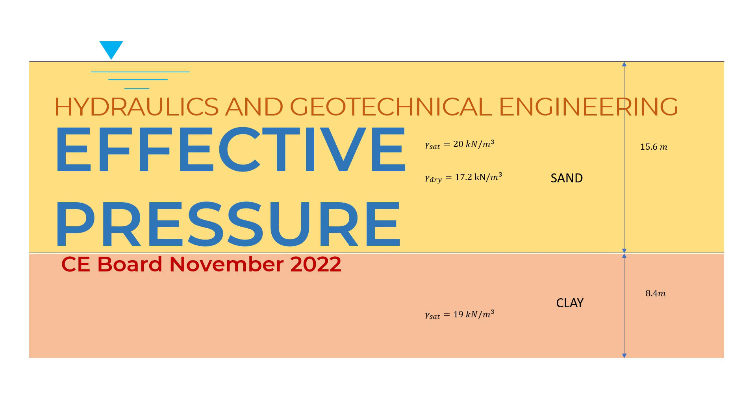So, we have here another problem from the CE board November 2022 under hydraulics and geotechnical engineering. This time we will get the effective pressure. Okay, so without further ado, punta tayo dito sa ating problem.

A clay, gamit lang tayo ng laser. A clay layer is 8.4 meter thick. So, ibig sabihin, yung thickness ng ating clay is 8.4 meter. Is overlain by 15.6 m thick sand to ground surface. When the water table is at the ground or at the sand surface, the saturated unit weight of the sand is 20 kN per cubic meter, and its dry unit weight is 17.2 kN per cubic meter. The clay has a saturated unit weight of 19 kN per cubic meter.

The groundwater table was lowered 7.8 meter and the degree of saturation of the sand above the new water table is 30%. Number 1 is evaluate the effective pressure at the mid-height of the clay before lowering the water table. Second, evaluate the effective pressure at the mid-height of the clay layer after lowering the water table. And third, evaluate the effective pressure at the mid-height of the clay layer when there is no water in the layer but the sand remains in moist condition with the same degree of saturation.

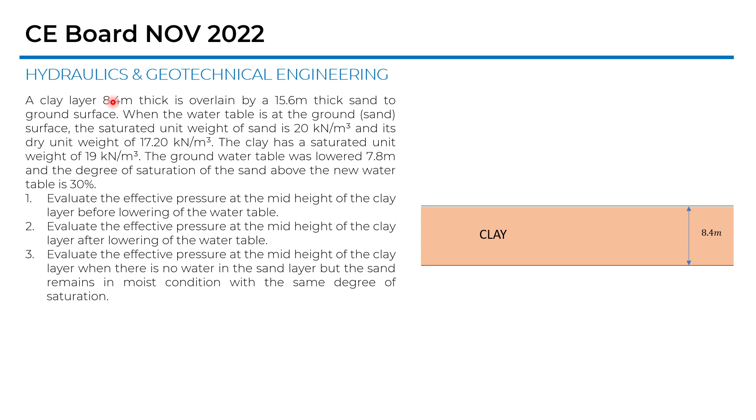Okay, so i-drawing muna natin yung kalagayan. Ito yung clay that is 8.4 meter thick, tapos overlain by the 15.6 meter thick na sand. So ito yung magiging surface. When the water table is at the ground, ibig sabihin andito sa surface ng sand sa taas, dito natin matatagpuan yung water table. The saturated unit weight of the sand is 20 kN per cubic meter, the gamma dry is 17.2 kN per cubic meter, and yung gamma sat natin sa clay is 19 kN per cubic meter.

Tapos, the groundwater table was lowered. Mamaya na yan. Sagutan muna natin itong number 1, evaluate the effective pressure at the mid-height. Kasi mamaya ilo-lower pa yung 7.8, dito bababa itong water table sa number 2. Tapos sinasabi dito na the degree of saturation is 30%. Kahit na bumaba ito, magiging 30% pa din yung degree of saturation dito sa taas.

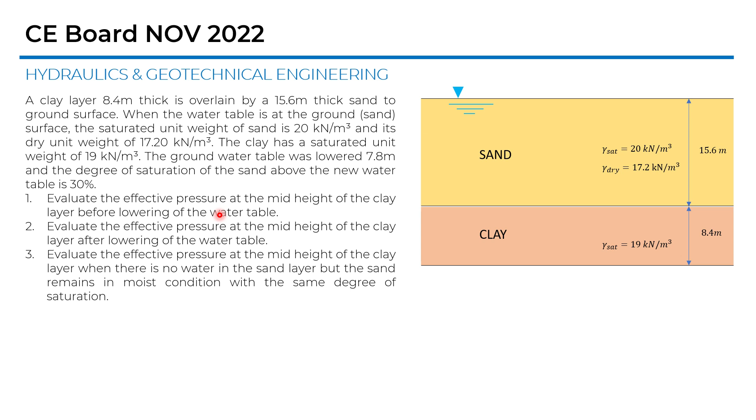Punta muna tayo sa number 1, evaluate the effective pressure at the mid-height of the clay. Asan ba yung mid-height ng clay? I-divide natin yung 8.4 into 2, so 4.2 meters. Dito natin matatagpuan yung mid-height ng clay. Ano yung magiging effective pressure niya dito sa 4.2 meters sa clay?

Total pressure muna natin i-compute. Saturated kasi siya kasi may halo pa siyang tubig. So 19, gamma sat, times 4.2, plus 20, gamma sat ng sand, times 15.6, kasi may halong tubig. That is your pressure papuntang mid-height ng clay, which is 391.8 kPa.

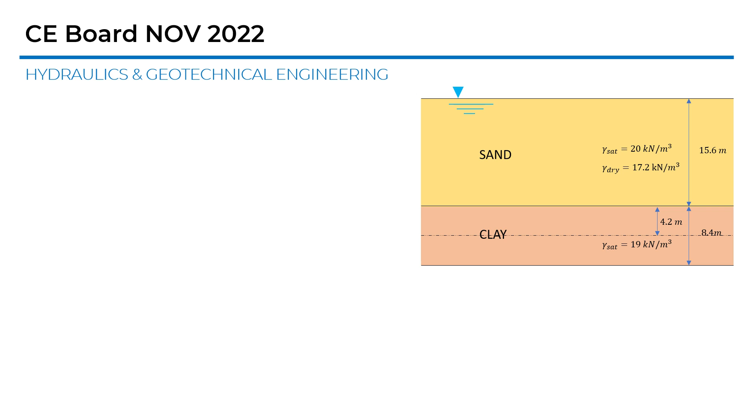197.56 kPa. Second is evaluate the effective pressure at the mid-height of the clay after lowering the water table. Ilo-lower down natin yung water table ng 7.8, which is also the mid-height of the sand, kasi 7.8 plus 7.8 is 15.6 meters.

So, ganito paano i-compute yan. Wala ng tubig dito sa taas, pero given tayo ng degree of saturation na 30%. Kailangan natin yan i-solve kasi magiging moist pa din to, may natitirang moisture pa din na 30%.

Okay, so we need to compute the moist unit weight. So, kukumputin muna natin dito yung moist unit weight niya, yung gamma M, gamma moist. Okay? So, mayroon tayong formula for the Y-sat. Yung Y-sat, saturated, is GS plus the void ratio of the soil, all over 1 plus the void ratio, times the gamma of the water.

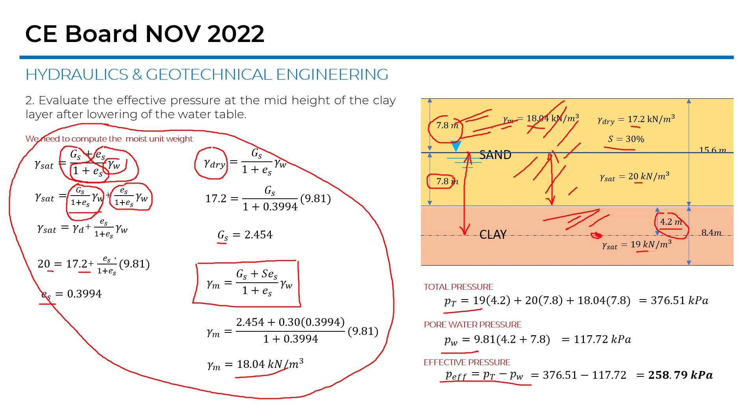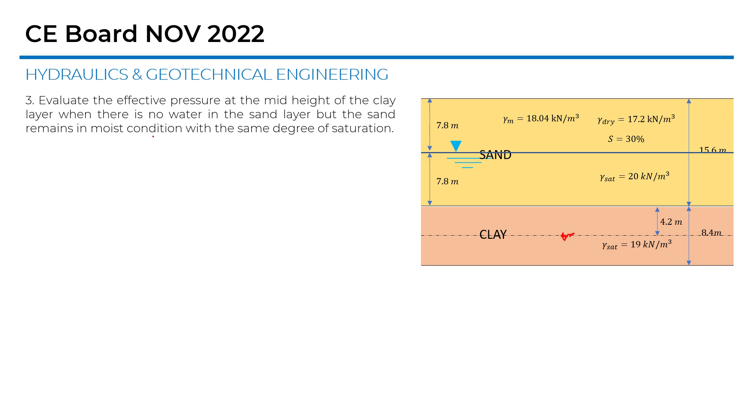Okay, how about for number 3? For number 3, evaluate the effective pressure at the mid-height of the clay, ganun pa din, sa mid-height, when there is no water at the sand layer, but the sand remains moist, so with the same degree of saturation.

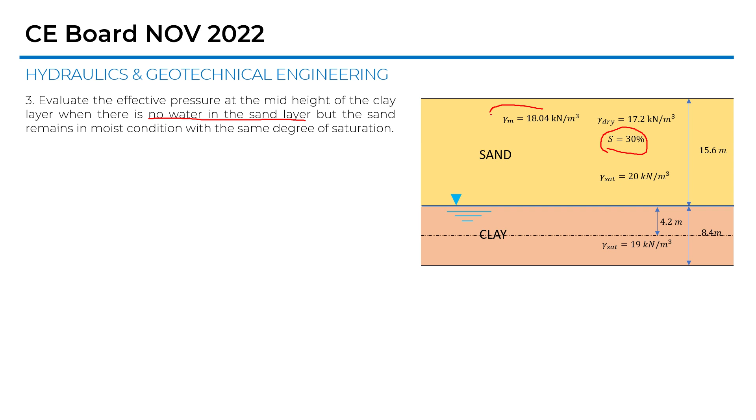Actually, may saturated pa din tayo ng 30%. So, we don't need to compute the gamma moist kasi na-compute na natin kanina. Kasi pareho lang din naman yung saturation niya. 'Di ba? So, mas madali na. So, gano'n na yung pagsosolve natin.

Total pressure is equal to 19 times 4.2. Ito pa din kasi basa pa din siya dito. Tapos 18.04 times 15.6 na. Ito na yung gagamitin natin kasi hindi na totally saturated to. 30% na lang yung saturation niya dito. So, gagamitin natin yung value ng gamma moist. So, we have 361.224 kPa.

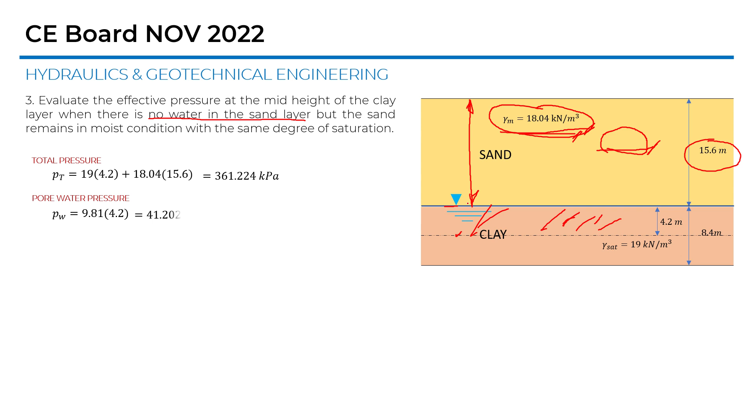So, for the water pressure naman, ito na lang yung kukumputin natin, from this portion up to the water table. So, we have 41.202 kPa. And then the effective pressure is equal to the total pressure minus pore water pressure. We will get the value of 320 kilopascal.

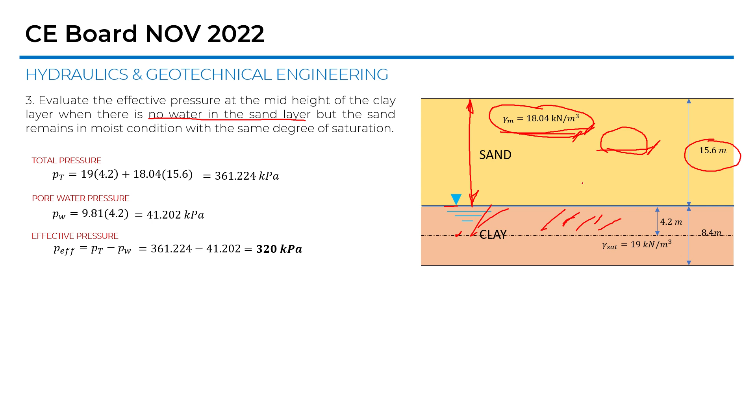So, yan yung pagsosolve natin dito sa ating problem under the topic of geotechnical engineering. Okay, so that's all for today.